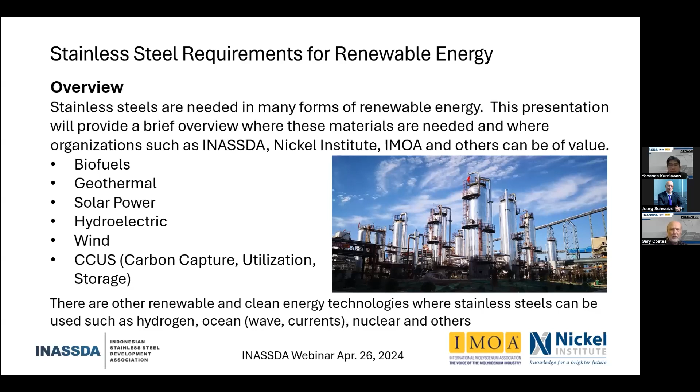What we're going to do as an overview today is talk about certain of the renewable energy areas: biofuels, geothermal, solar power, hydroelectric, wind, carbon capture, utilization and storage, and also how certain organizations such as INASSDA, the Nickel Institute, IMOA, and others can be of value. I'm not going to cover some of the other renewable energy technologies such as hydrogen, ocean currents, nuclear. Those are all relatively clean energy sources, but I won't have time to cover those in any detail at all.

So a little bit on why stainless steel. Well, because stainless steels have many properties of value to the renewable energy production area. First of all, there's a wide range of alloys suitable for a wide range of corrosion resistance, from structural applications resistant to atmospheric corrosion, to some very highly corrosion-resistant alloys for highly corrosive conditions. High temperatures: we can go up to about 1150 degrees C or slightly higher with certain stainless steels. And we can go down to very low temperatures, liquid hydrogen temperatures, maybe even liquid helium temperatures if we had to, with certain of the stainless steels.

Strength: some of them have a moderate strength level and some of them have a much higher strength level, so we can fit the needs of different strength levels for different applications. Life cycle cost effective: stainless steels are not necessarily the least expensive choice, but they last over the long run, and therefore their life cycle cost can be very effective. They're durable and resilient in this time of climate change where we have floods and typhoons and all sorts of weather events that we have to be careful with. Stainless steels are durable and they last. They're resilient. They're earthquake resistant.

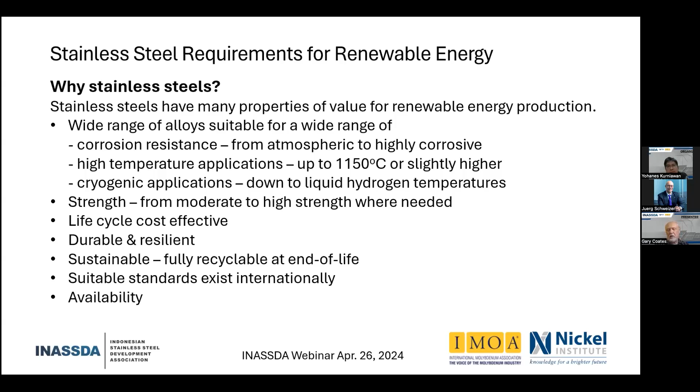So just a quick refresher on the families of stainless steel and the types, and we'll be mentioning some of these grades in this presentation. The austenitic alloys, the 300 series: 304L, 316L, 904L, 6-moly. They're the most commonly produced of all the families. They are highly ductile, reasonably strong, easily weldable, one of the most important keys when we're doing fabrication, and they can be used from cryogenic to very high temperatures.

The ferritic alloys, for example 430 and 444, are not commonly used in the chemical, petrochemical or renewable energy industry, but they do have some use in very specialized applications. The duplex alloys, which are a combination of the austenitic and ferritic structure, have higher strength than the austenitic and ferritic alloys, and they have some special properties of interest. We'll talk about them as we go through the presentation.

It's a wide family, from the lean duplex, for example 2101, to the standard duplex 2205, to the super duplex 2507, and there are even hyper duplex alloys that are very specialized, available only in limited product forms, but it just shows you that you have a wide range of possibilities there. The martensitic alloys are the ones that are hardenable by a quench and temper heat treatment.

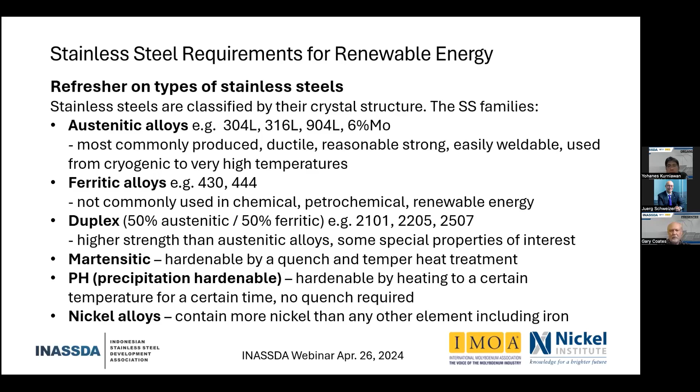And this I'd like to show just to show that the different families have a wide range of corrosion resistance. I could also show the same for the strength, but some of them, such as the martensitic and PH grades, they only have sort of the bottom end of the corrosion resistance, starting with the 10.5% chromium, which is the definition of a stainless steel, up to a somewhat moderate level. Whereas the 300 series runs from a fairly low level to a very high level. And as I mentioned, those nickel alloys continue on into even higher corrosion resistance. The ferritic and duplex alloys fall into that same range roughly as the 300 series, but they do have other limitations.

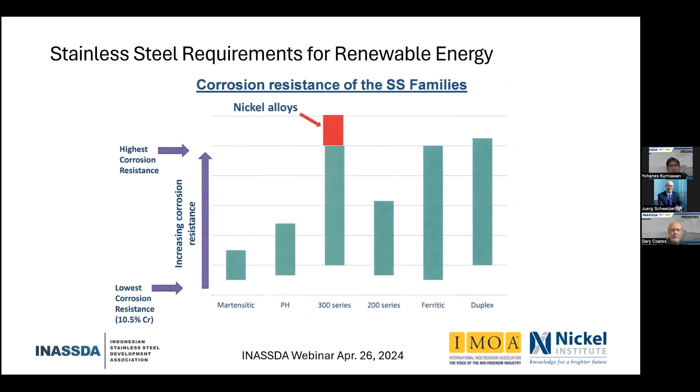So let's have a quick look at what the International Energy Agency, which has a lot of very good publications on renewable energy, says. And if we look at their chart of the different renewable energy technologies on the left, and across the top, the different alloying elements that are needed here. We have nickel and we have chromium, two important ones for stainless steel. The open circles mean that there's a low need in those particular applications. The gray is a moderate need and the dark is a high need.

And you can see that for wind, for concentrated solar power, that's the CSP one, we'll talk a bit about that, there's some need for stainless steel, nickel, and chromium. Geothermal, there's a great need for that. Nuclear, back to the gray, moderate level. And then in the International Energy Agency, they have battery storage. And of course, we all know that nickel is really important for batteries and also in the use in hydrogen here.

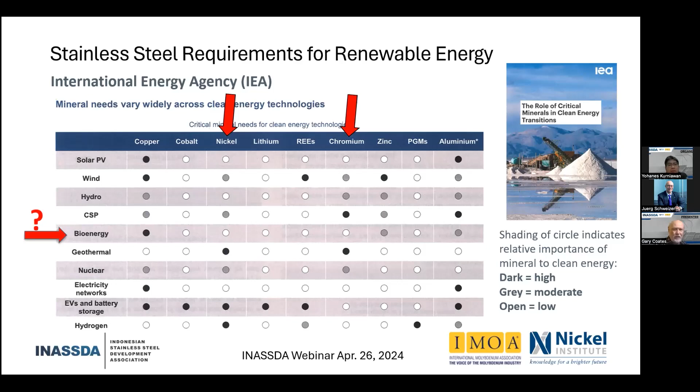Now, just to show that you've got to be careful what you read, bioenergy, they actually have an open circle for both chromium and nickel. We see that bioenergy is existing now, one of the greatest users of stainless steel, and that'll be the first one that I talk about here.

So biofuels, they're considered clean because the feedstocks for biofuels are usually plants that take CO2 out of the air. And sometimes we're talking about the feedstock being a used cooking oil, going to McDonald's for your French fries, and the cooking oil, after a while they used to throw it away. Now most of it is being transformed into a biofuel, or other types of animal fats. Of course, if biofuels are combusted, burnt, which is really their purpose, carbon is released back into the atmosphere. And since we use some carbon in the planting, the growing, the harvesting, and the processing, biofuels are not really carbon neutral, even if we can afterwards sequester the carbon.

But they're an important part. We will need liquid fuels. We want to drive cars and trucks that use petrol and diesel, and especially airplanes. You want a liquid fuel there, at least in the short term, because liquid fuels are easy to handle. You can replace existing liquid fuels often with little or no change to the engine.

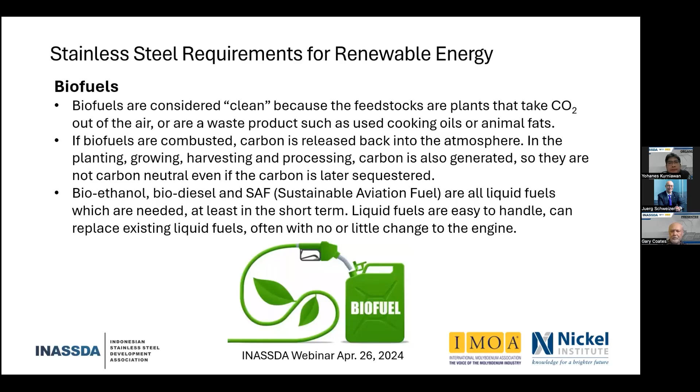So let's talk about ethanol first. The major production today of ethanol as a biofuel comes from either corn, sugarcane, or grains. It's a well-established, relatively simple technology, economically viable. The common stainless steels, 304L, 316L, are widely used, as well as some components in some special stainless steels and carbon steels. But about 95% of the plant is typically 304 or 316.

Now, the United States and Brazil have been the major worldwide producers. In 2022, I saw about 80% came from those two countries, but other countries are embarking on a program to produce bioethanol. India, for example, has aggressive targets. They want to have 20% ethanol in all their petrol by 2025. That's, of course, only next year. They're about 12% now on average, and they probably won't make the 20% by 2025, but they'll come close. And that's something that we can emulate as a country, getting the ethanol into our petrol.

Ethanol produced from corn, sugar cane, or grains contains a small amount of water, chlorides, and acid, and it results in a measurable corrosion of carbon steel, so stainless steel is needed.

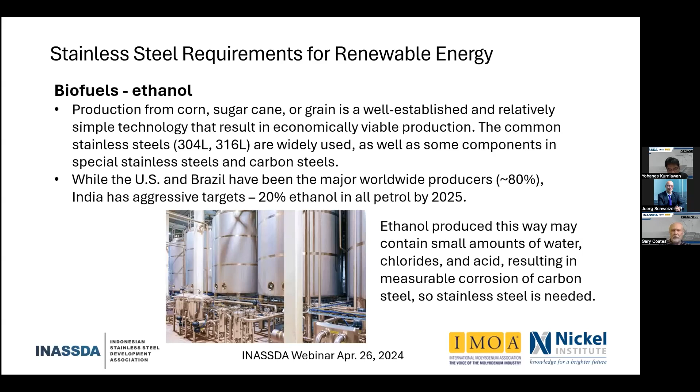When I visited a bioethanol plant here in North America, I met the maintenance person there, and she said her plant was basically 80% stainless steel, but she wished it was actually 100% stainless steel, because the only maintenance they did at that time was on the carbon steel, replacing it on a fairly regular basis. So it is good to try to optimize by using stainless steel 304, 316 in these plants.

Now, when you take this bioethanol and blend it with petrol, or gasoline as we call it in North America, you can get stress corrosion cracking of carbon steel. Of course, petrol or gasoline you can normally handle with plain carbon steel, but when you blend it with ethanol, that water, chlorides, and acid in there can cause stress corrosion cracking of the carbon steels.

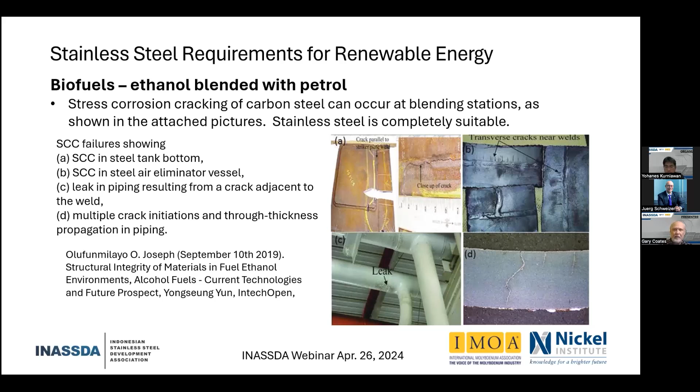There have been a number of cases at the blending stations, where they mix the ethanol with the petrol, where you've experienced that. And of course, you don't want to have leaks of a very flammable fuel there. So those tanks and piping systems are most often stainless steel, again 304L or 316L.

Just as a comparison with other materials: aluminum, with the E10 blend, which is only 10% ethanol and has really been the common amount in North America, severely corrodes. Brass components will corrode. The martensitic stainless steels, which have that minimum level of corrosion resistance, have suffered pitting in some environments because of the chloride content and small amounts of organic acid, acetic acid, that are present.

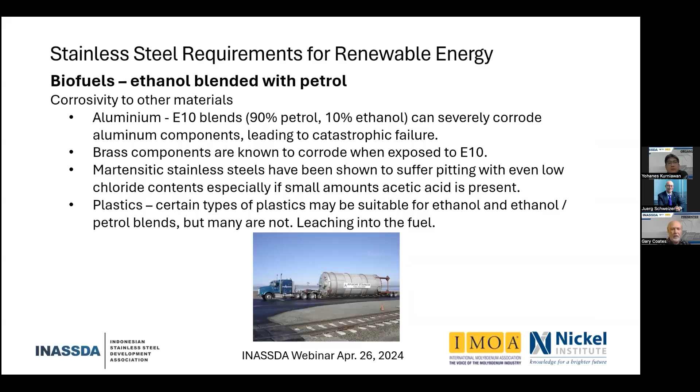Certain plastics are suitable, but we have a real problem when other plastics that aren't suitable for the blended material, but are suitable for the petrol product, are used instead. Then the blended material is put in, and the plastic leaches into the fuel and gums up the engine. So you have to be very careful with using plastics.

Now, we can take the carbon dioxide that is generated when we produce bioethanol. It's a relatively pure stream, easy to clean up, and although it has some uses such as in food, we can also use it to enhance oil recovery, and this has started to be done in the U.S. right now. A number of bioethanol plants have gotten together to capture and clean their CO2 and then send it in an existing pipeline back to the oil fields, pump it down, and that enhances the recovery of oil.

And that's one way of also getting carbon out of the atmosphere, by pumping it down. Otherwise, it's often just released to the atmosphere.

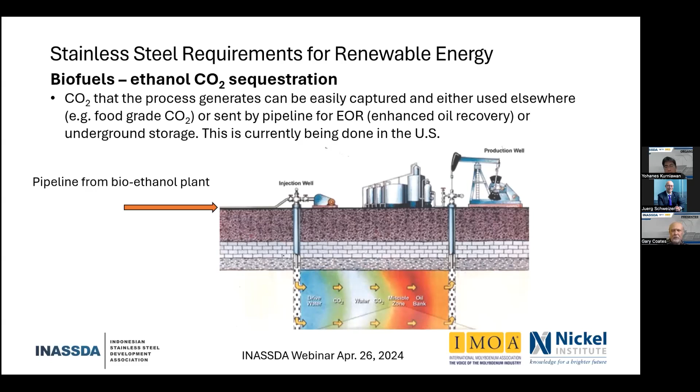Of course, there has been some objection to using agricultural products that can be used as food for fuel production. So there have been major efforts to make ethanol out of waste agricultural products, waste forest products, or other plant-based wastes. This is much more difficult, and one of the reasons is the large variability of feedstock requiring different treatment conditions — one feedstock might require a different pre-treatment process than another. This can make it very difficult.

We need acid and high temperature, so we were looking at corn stover, which is the waste product from when you grow corn. You use 1 or 2% sulfuric acid, and the higher the temperature, the quicker the process happens. So to make it really cost efficient, you do need a higher temperature, and that involves highly alloyed stainless steel, perhaps the 6-moly stainless steels or 904L, or nickel alloys.

The most effective use at the highest temperature was with the high molybdenum C-type alloys. But once you get beyond the pre-treatment stage, it's a relatively less corrosive process as the temperature drops, and so the rest of the plant is normally done with 304L, 316L type materials, or perhaps some use of duplex.

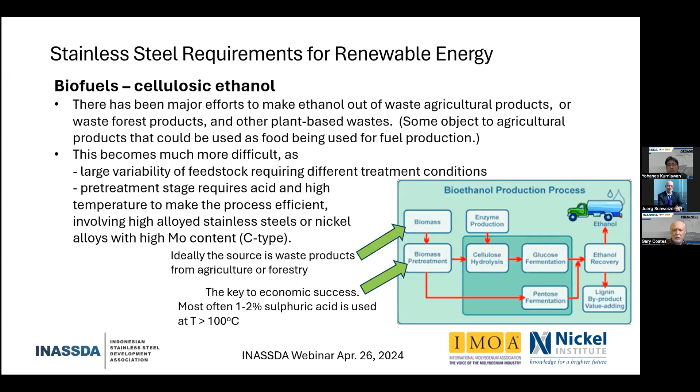One of the things that confused me for a while is that there's a difference between biodiesel and renewable biodiesel. They sound like they should be the same. Biodiesel is made from oils and fats, your waste cooking oils, but that's actually different from what we call renewable biodiesel, which can also come from those waste oils and fats, but is most commonly made from vegetable oil now.

I'm not an organic chemist, but I've been told there are differences. One is a fatty acid methyl ester, and the other is a hydrogenated compound.

There are a lot of small scale plants making just biodiesel fuels, mostly from waste oils. But the major effort, at least in North America and Europe, has been making biodiesel from vegetable oils - specially grown crops to produce renewable biodiesel. It's a cleaner fuel, runs more efficiently, and it can be made in the same kind of plant refinery that an oil refinery is. I'll come to that in a minute.

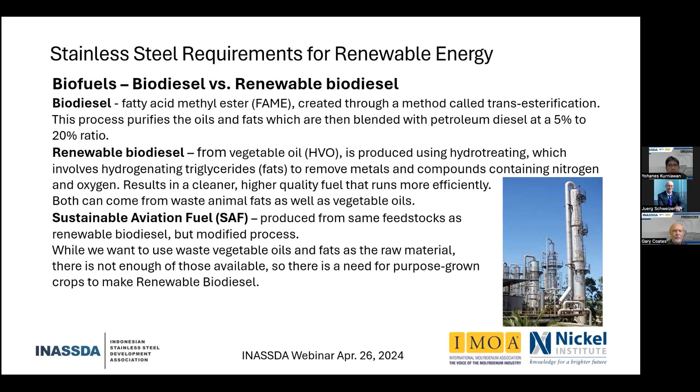As I mentioned, a refinery that can produce standard diesel can also do renewable biodiesel. A lot of small refineries are now being converted in the US and Europe to use vegetable oils.

However, it may sound strange, but it was found that these vegetable oils and fats are far more corrosive than most fossil fuels. Those of you from the petrochemical industry know about the total acid number - it's really an indication of the amount of acid in the oil, and that value is much higher for vegetable oils. It depends on the specific vegetable oil how high the total acid number is.

So rather than using chrome moly stainless steels or even carbon steels, which you can use in certain fossil fuel oil refineries, you need to start off at the front end with anywhere between 316L and 6% moly, depending on the type of vegetable oil used as feedstock. For a refinery, they have to consider: can we always get a particular type of vegetable oil, or must we design our plant to handle different types? So often they go for the more conservative approach of a higher alloy material at the front end.

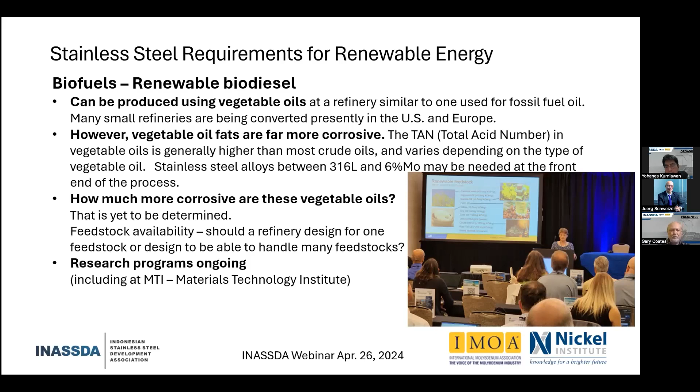The next renewable energy source I'll talk about is geothermal. Many of you are familiar with that - you use hot water, brines, or steam from deep in the ground that are heated by the heat of the core of the earth. You can extract the heat and use it to generate electricity, or use it for hot water for heating buildings. In cold climates, that's a very important source of energy - you need to heat buildings in the winter months. Typically, places using geothermal heat for buildings include countries like Iceland or New Zealand.

Essentially, you can get geothermal energy from anywhere, but the ones we're talking about that generate electricity are mostly in areas close to volcanic activity. There are different kinds of geothermal plants - I won't go into details here, don't have time for that.

One of the key factors is that unlike wind and solar, geothermal plants run 24 hours a day, 7 days a week. They supply energy constantly - you can turn them up or down as energy demand changes, so they are very useful that way. They are a little more capital intensive - they cost a bit more to build than solar and wind, but they have the advantage of being available all the time.

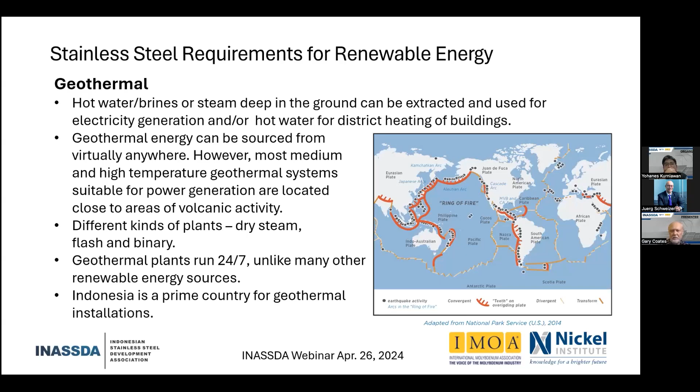Indonesia is a prime country for geothermal installations. There are some in Indonesia, I understand, but there could be a lot more. The downhole conditions, the local conditions, vary immensely.

Of course, everybody would love to use carbon steel, and many of the plants actually do. You can use similar guidelines to those used for oil and gas production - NACE MR0175, ISO 15156 can also be used to help determine the appropriate material. Some other plants will use stainless steel, and there are even some that use nickel alloys. I'll mention one about that shortly.

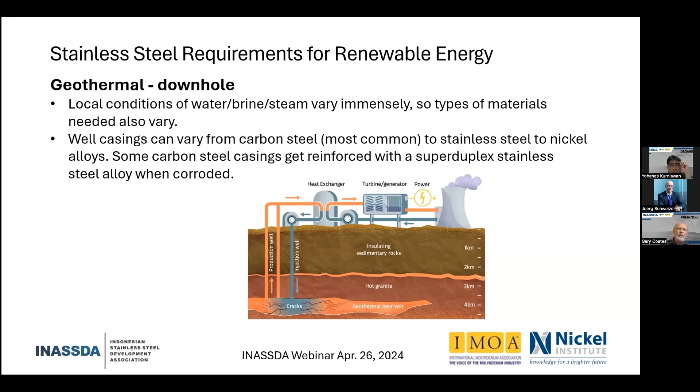There are some cases we've seen where the casings corrode after a while, and you reinforce them typically with a super duplex stainless steel alloy. The reason for that is compatibility from a thermal expansion point of view, and you also get high corrosion resistance.

The type of materials used depends on the nature of the geothermal fluids. In binary cycle plants, you might use a heat exchanger instead of driving the turbine directly with that liquid. But all sorts of materials are used, ranging from chrome-moly-vanadium steels and non-stainless steels for the rotors, to stainless steels like 12% chromium, 17-4PH, 316L, 2205 duplex, 2507 super duplex, 6 moly, and even nickel alloys such as 625, which has 9% molybdenum. They're all used depending on the nature of the plant, so each plant will be slightly different. You must know the nature of the geothermal fluid.

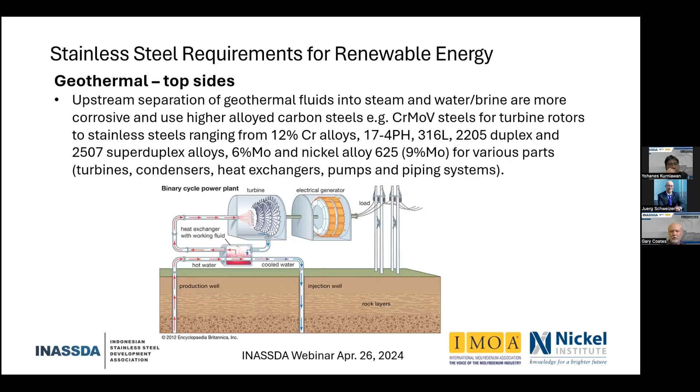I'll mention the geothermal Salton Sea plant in California, which has been operating for about 20 years and involves very corrosive brines. They use nickel-based alloys, typically with 12 to 16% molybdenum, and alloy 625, depending on the temperatures involved, as well as super duplex 2507 in less aggressive conditions. One reason I mention this is that the brine also contains lithium, and they're currently adding a lithium extraction unit to one of the plants. Lithium is needed for electric vehicle batteries, and a shortage is predicted. Extraction is always expensive and has environmental considerations, but here the brine is already extracted and used to drive the turbines and generate electricity. By the time they can extract lithium, it's cooled to a temperature where it's less corrosive, but you still need highly alloyed stainless steels.

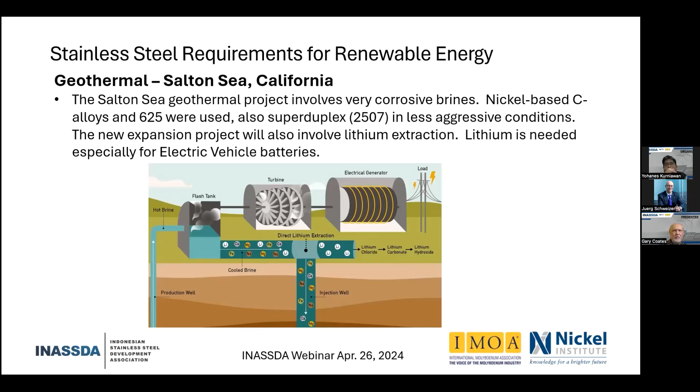AMPP is developing a standard on materials for geothermal applications, something we've been pushing them to do. There's a lot of knowledge in the world from places with existing applications, but much of it is considered proprietary. We want a document that can be used as guidelines by anyone to help decide what materials to use. Just last March, the AMPP group studying this decided to develop a standard. In addition, they've had formal paper sessions and informational sessions, and the Nickel Institute has run informational sessions for the last few years on materials for geothermal applications.

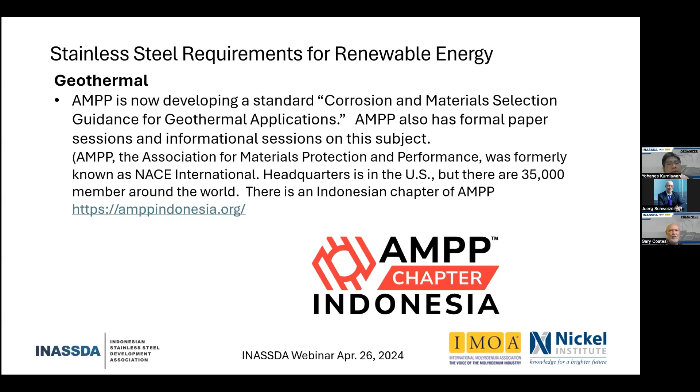In case you haven't heard of AMPP, it used to be known as NACE, a name most people are still more familiar with, and I still use it myself even though it's properly called AMPP today. Although headquartered in the US, it has 35,000 members around the world, about a third outside North America. There's an Indonesian chapter of AMPP, and I've provided the website address if you want to look at it. There are conferences in this area too, including one coming up in September in Singapore, and I know Indonesia will be well represented there.

Some energy technologies don't use a lot of stainless steel but still rely on it in important ways, like photovoltaic solar systems. Solar PV and wind are the least expensive sources of renewable energy. Solar PV ranges from small rooftop installations to very large solar farms. There have been insurance claims on solar installations damaged by weather events like typhoons and floods. One area we're looking at is the support frames, traditionally built from lower-cost materials like galvanized steel, aluminum, or weathering steel, though some use stainless steel. In Japan, they use lean duplex; in Europe, for some roof installations, they use 304 or 316 stainless depending on whether the site is inland or near the coast.

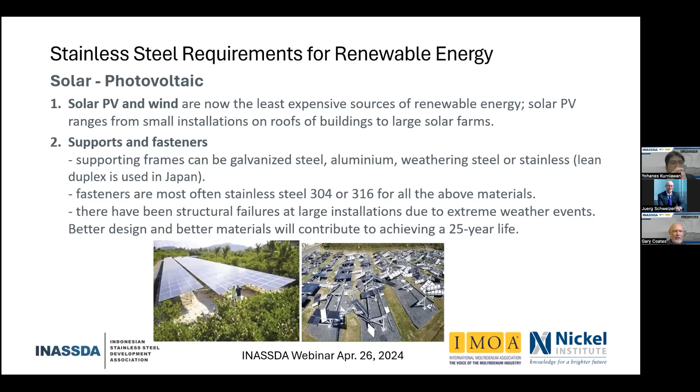In these support systems, the fasteners are almost always stainless steel. So if it's a galvanized steel supporting frame, they'll use stainless steel fasteners, and the same applies with aluminum and weathering steel frames. Stainless steel is important there for the fasteners. It's a combination of better design and better materials that will contribute to achieving a 25-year life on these solar photovoltaic applications.

One of the new areas under development is concentrating solar power. There are different technologies available. One of the more interesting ones is the tower system, where you have a series of mirrors that track the sun and focus the sunlight on a receiver at the top of a tower. You can get very high temperatures there, 500 to 1,000 degrees C, and with the higher temperatures you can get higher power efficiencies out of the electrical generators.

You can store the heat as a molten salt. Usually we will use molten salt running from that receiver down to the generator. The molten salt can be stored for when the sun is not shining but the power is needed, or in the evening when the sun is low on the horizon. So there's a lot of interest in this technology.

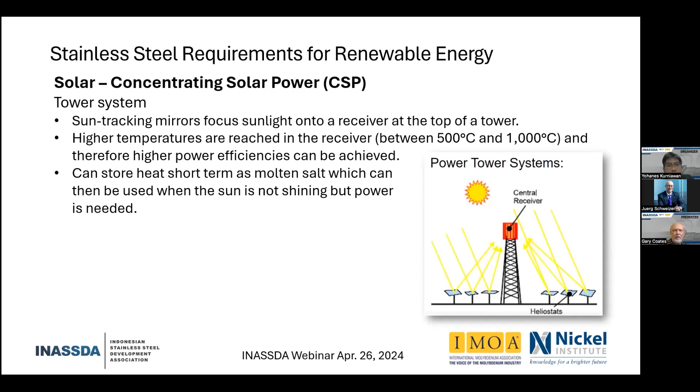The receiver materials are typically a nickel alloy, the 625 with 9% molybdenum is the standard grade. They can sometimes use a lower alloy material, the 800, which is actually classified as a stainless steel in the North American classification, although we often think of it as a nickel alloy, or alloy 230, which is a true nickel alloy.

Heat storage tanks for molten salt can be 347H, and they will typically use the structural stainless steels 304L and 316 as support structures. These are moving structures, so you want to have high fatigue life in a somewhat corrosive environment.

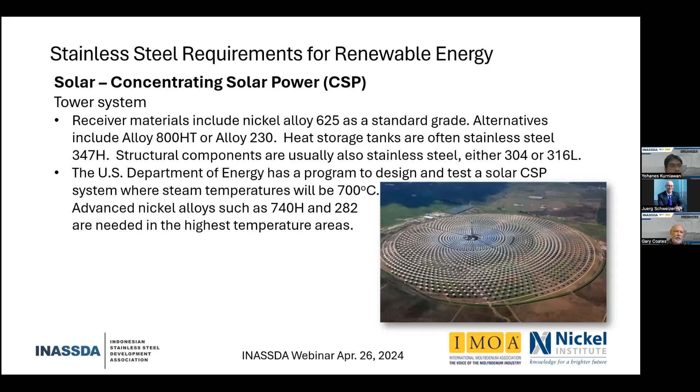Right now the U.S. Department of Energy has a program to design and test - it's been built now - one where steam temperatures up to 700 degrees C will occur in the steam, and it'll be like the advanced ultra supercritical coal-fired power plants. There they need special nickel alloys: 740H, 282 are new alloys being tested out for that application.

So I'm going to talk briefly about hydroelectric. That's certainly not a new technology. They use a relatively small amount of stainless steel, but the key components will need to be stainless steel due to the erosion coming from water at high velocity. Cavitation is where a little piece of the material pops off because of very high velocity, or corrosion issues - water is corrosive to a certain extent.

The turbines are often made of a martensitic stainless steel, usually with a nickel addition, which helps in the weldability or repair. So a grade called 410 nickel moly, or the cast equivalent CA6NM, or similar alloys are used. The company I used to work for had a martensitic ferritic austenitic alloy, a triplex if you want to use a name for that, which was a weldable grade used in Francis turbines.

So there are different technologies for turning the pressure of water into electricity, and depending on the turbine type there are different preferences. But things like the penstocks - that's the pipe that brings the water down from the dam to the turbine - are often now being made in stainless steel so that they don't have to be replaced during the lifetime of the installation.

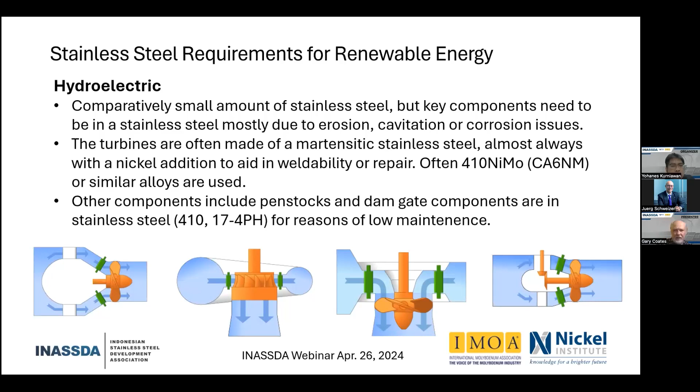Even the dam gate components are often made using stainless steel, again for long life. Here's where that 17-4PH, which doesn't require a quench afterwards and therefore has low distortion, is used for certain components where you have long lengths - they might be 50, 70 meters in length - and you want them perfectly flat, as the rollers of the dam gate will go against it. You want low maintenance in those applications.

There is wind in power generation. We talked about it, and of course wind turbines can be either onshore or offshore. The difficulty with wind turbines is wind is intermittent and somewhat unpredictable in supply.

There are some videos on YouTube that show people trying to get to these offshore wind turbines, both getting into the towers and even doing the substructure underneath the water. They are very difficult and therefore very expensive to maintain. So there are a lot of challenges with them today, and there will be in the future too. So people are looking at trying to have low maintenance wind turbines, doesn't matter whether it's offshore or onshore.

Most wind turbines today are in the area of 3 megawatts, but they want to go to higher power capacities for an individual installation, maybe even going up as high as 17, and people in China are talking about 20 megawatts. That means you need very high towers, with longer blades and heavier nacelle, the part at the top that generates the electricity.

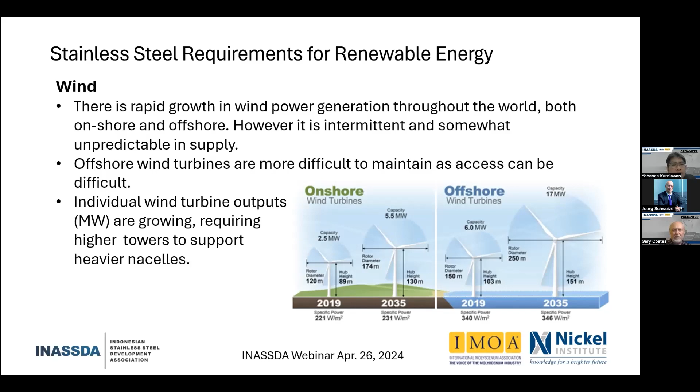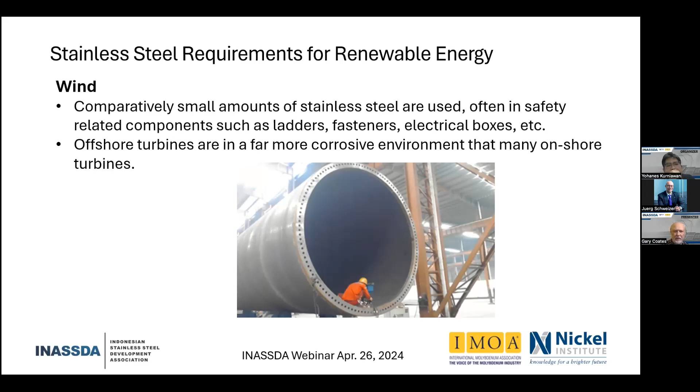However, the carbon steel that is used can have thicknesses up to 125 millimeters and more. You need very high fatigue strength, thinking of these offshore ones bobbing around in the ocean, and especially the heat affected zone of the weld is where the critical fatigue property is needed. There are only a few plate mills in the world that can make plates in the required thicknesses. You want wide plates with less welding and longer length, so you can do the whole diameter in one length of pipe.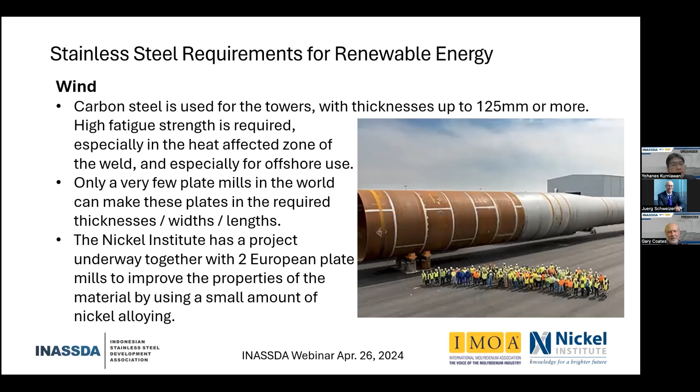So very heavy plates, and though this isn't stainless steel, the Nickel Institute has a project underway right now with 2 European plate mills to improve the properties of the material using a small amount of nickel alloying - maybe 0.75% nickel. So it's not a stainless steel by any stretch of the imagination, but the little bit of nickel helps a lot with the fatigue properties and the toughness. The opposite of toughness is brittleness, so it helps in cold weather. We have some wind turbine towers in northern Canada where it can be minus 50, minus 60 degrees C in the wintertime, so toughness is extremely important for them.

The final technology I'll talk about is not really renewable energy, but it relates to reducing the carbon footprint of some applications that are using fossil fuel, but also ones that are using, for example, biofuels.

There are 4 distinct categories of carbon capture, utilization, and storage. One is where you have an existing process and you modify it. Or you actually do an add-on unit to an existing unit to clean up and concentrate the exhaust gas, so you take out the CO2 and then you either use it or store it underground. There are systems to transport the gas, including for permanent storage or to transport it for later use. Systems that actually try to use the CO2 gas to make some useful product from it. And then the final one is direct capture.

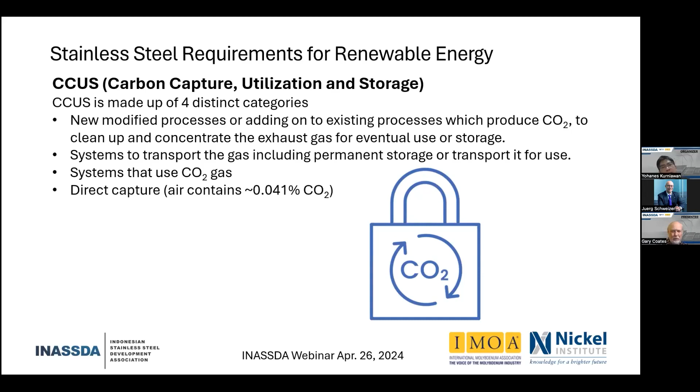Air contains only about 0.041% CO2, so that technology - people are working on it, but it tends to be very expensive. We'll talk about each one of those.

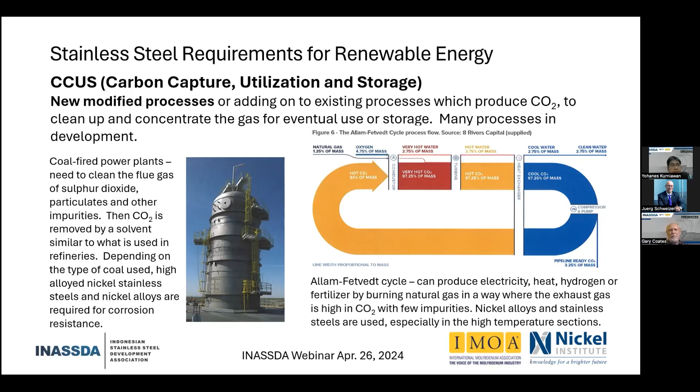An example of where you modify a process to concentrate the CO2 better is where you use natural gas and burn it in a special way that creates a high purity CO2 from it, and one of those is the Allam-Fetvedt cycle. There are, I believe, 2 plants operating and 1 under construction now where this is being tried and tested. It's proprietary information, but we know that nickel alloys and stainless steels are necessary there because of the high temperature sections.

Transporting CO2: well, I think most of us will realize that when carbon dioxide is completely dry, it's non-corrosive to carbon steel. You can handle and transport it in carbon steel. When it's dry and you compress it or liquefy it, carbon steel is still suitable, but because of the lower temperature, you want a higher toughness material. So we add a little bit of nickel for that, but you also add a little bit of nickel to the carbon steel to give it a higher strength, because when it's compressed, you have a pressure there. So you want to use a higher strength steel.

Those again are not stainless steels, but they're carbon steels that are optimized to give the higher strength but the low temperature toughness. And of course, when CO2 gas is humid, you get an acidic liquid, carbonic acid, and that is corrosive to carbon steel, and therefore you need stainless steel. Some people will do a coating on carbon steel, but coatings tend to not last the expected lifetime of the components.

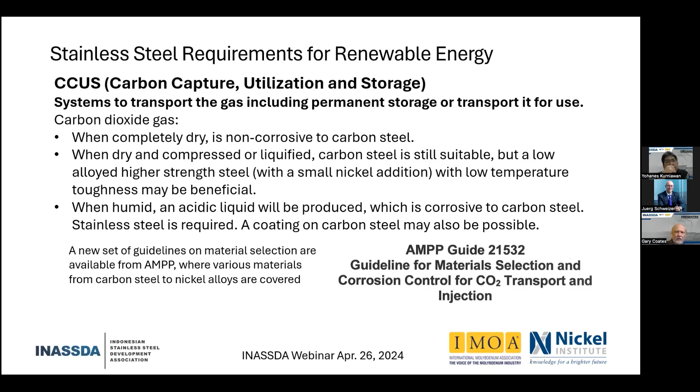Here, that AMPP organization has already come out with a guide. It was written by DNV in Norway, actually, on material selection and corrosion control for carbon dioxide transport and injection. A very, very valuable document and highly recommended. If you are an AMPP member, you can download that document for free. That guide just came out a couple of years ago, and I've found it very, very useful.

There's a lot of development work going on in trying to use the CO2 gas rather than trying to store it underground, trying to use it for applications. Already we use it in agriculture for making ammonia and then urea fertilizer, in food production and welding gases and a lot of other smaller uses. But there is a lot more CO2 available, or there will be, than what people can use now.

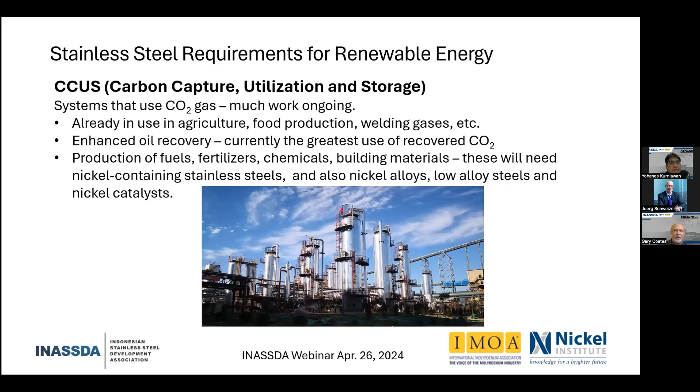Of course, enhanced oil recovery is the greatest use of recovered CO2 today, but people are working on production of fuels and fertilizers, chemicals, building materials that will use the CO2 and tie it up, store it in a permanent or semi-permanent fashion. And all those technologies will be using nickel-containing stainless steels, in some cases nickel alloys, the low alloy nickel-containing steels, and even nickel catalysts are needed there. So there's a lot of development work, a lot of work at universities. Perhaps some of the universities in Indonesia are working on some of those systems too.

And finally, I mentioned direct capture. It's very, very expensive. Some of the mines up in Canada, nickel mines and diamond mines, and some of the other ones around the world, have magnesium-containing rock as a waste material, and that rock will naturally absorb the carbon dioxide, producing a solid magnesium carbonate, which can be stored permanently, easily. It's a very slow process today, so the quest is to speed up that process.

And so many of the nickel mines are undertaking to do this so they can lower their carbon footprint and offer a low carbon nickel to the world. A lot of the battery manufacturers would like to say the nickel they have comes from a low carbon footprint material.

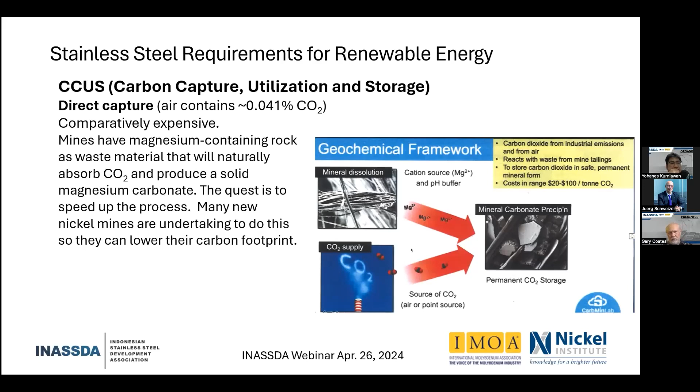So in summary, there's a lot of exciting opportunity for stainless steel and renewable energy. I'm excited about it. I see all the developments. It's hard actually to keep up to date with all the technologies that are being developed. And for a lot of them, it's a little bit unclear what materials are needed. I was, as an independent consultant, involved in one using waste forest products, and whether it works, whether it'll be economical, remains to be seen, but it will start up later this year. I find it very exciting, and I hope you do also.

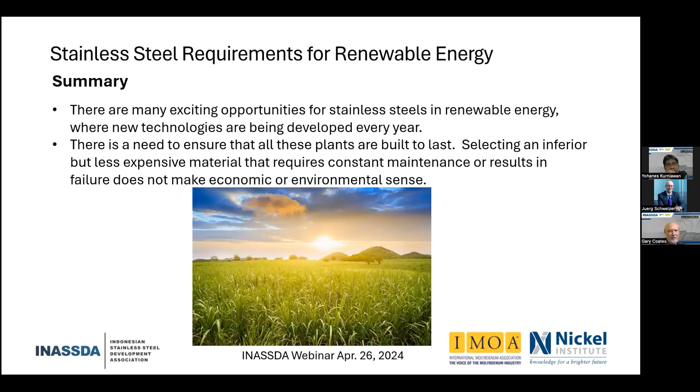And there is a need to ensure that all these plants are built to last. Selecting an inferior, less expensive material that requires either constant maintenance or results in failure and huge new capital costs really doesn't make economic or environmental sense. So it's really important to ensure that when we select a material for the particular application, it is the right material that will last the expected length of time on the equipment. Thank you very much, Gary.